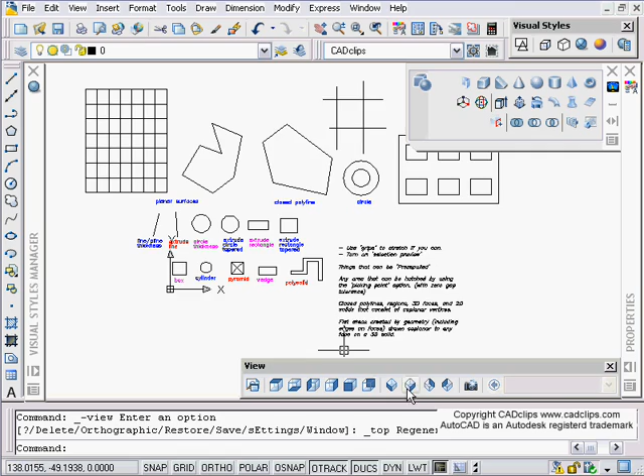So I'm just going to go to a diagonal isometric view, and I've got some basic primitive shapes in here that I've used these tools up over here to create some of these. And then from my previous lesson, I've extruded a rectangle and extruded another rectangle, and I should have tapered that. You can taper that circle being given a thickness, and just some samples of when we go to use our press pull, and don't get it mixed up with extrude, similar but not quite the same, the press pull tool.

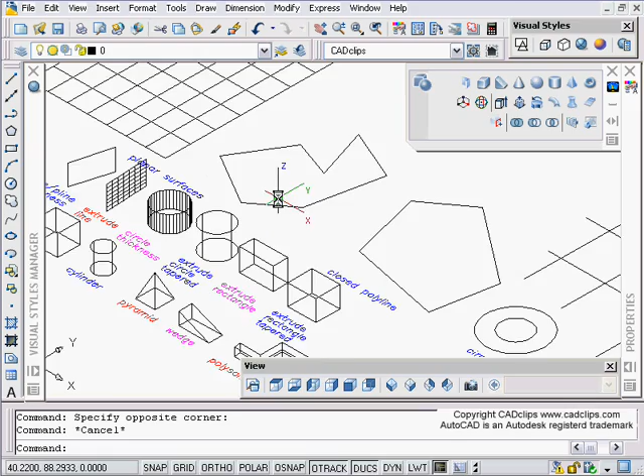And we've got a new object here, some planar surfaces that we're going to create, and this is a polyline that we're going to turn into a planar surface. So I'm just going to take a look at my notes here. First of all, use grips to stretch if you can. And what I'm talking about here is we have some primitive objects over here. As long as we don't press pull them or extrude them, we can use our grips here to stretch the shapes of these quite easily in 2D or in 3D.

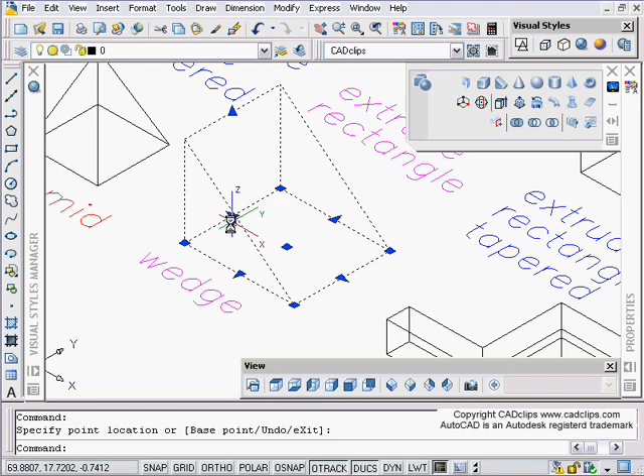So I can go back while this is still a wedge, and I can click on here and do all kinds of neat stuff and whatever is available with that particular primitive object. Okay, or even something that's been extruded. Okay, this has been extruded. Grip on here and you can stretch this stuff around. We have different shapes. We have a polysolid. We can do different things with a polysolid.

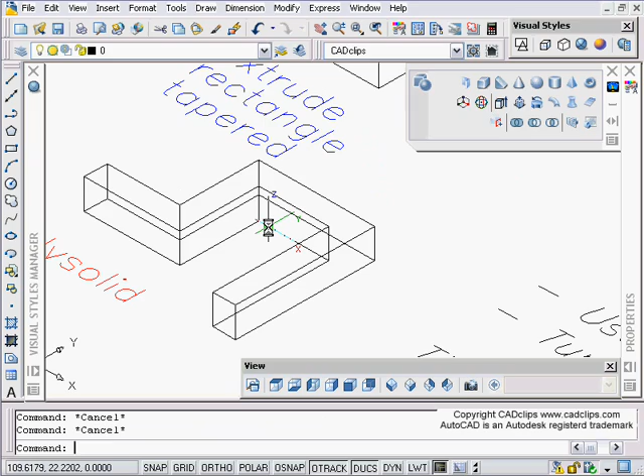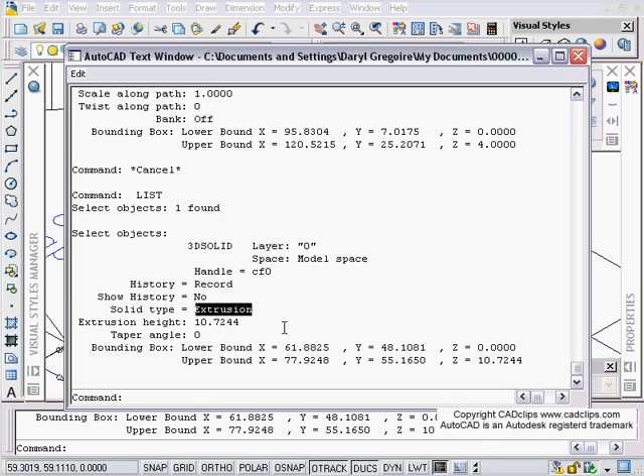Once we go in and use our press pull, you'll notice that if I list this, it lists as a 3D solid. If I list this, it's a 3D solid, and it's called a wedge. Okay, we saw this in the previous one, 3D solid, and it's a sweep. Okay, just take note of that. Okay, if I list this, it's a 3D solid and it's just an extrusion. Okay, we're going to see something else in a minute. Again, we list this, it's a pyramid, and it is a 3D solid.

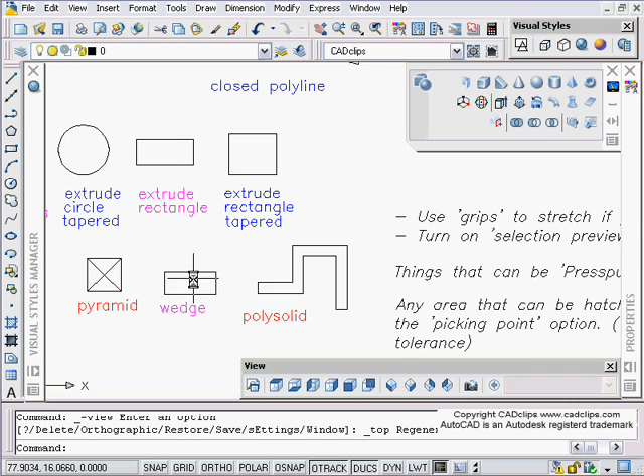Okay, so now when we go to do our press pull, first thing is use the grips as indicated, as much as you can before you go in and start press pulling, because once you press pull, you'll lose the control and the grips of that primitive object. Okay, turn on selection preview when you're doing your press pull. So when you do your press pull, you'll notice that if you go down inside of here and you start your command, you're going to hover over these edges.

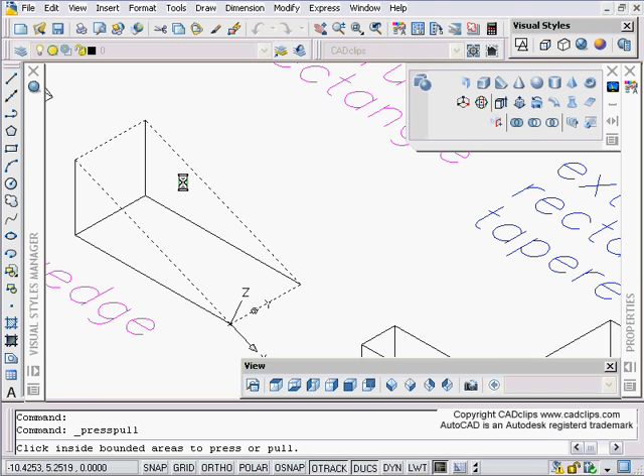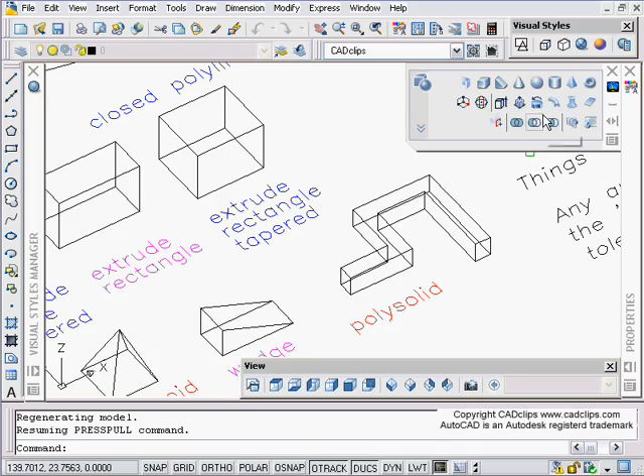Well, if you don't have selection preview turned on in your options under selection, then these edges won't preview, and sometimes you might have to swivel around with the shift middle mouse button to get that other side. If you can't get the side you want, shift middle mouse button will let you swivel around and grab the sides you want. I'm still in the middle of my press pull command. I started the command, and then shift middle mouse button allows me to transparently move around my object and zoom in and out with the wheel while still remaining in that command. Okay, so that's just a couple of notes before we get started. So turn on selection preview in your options.

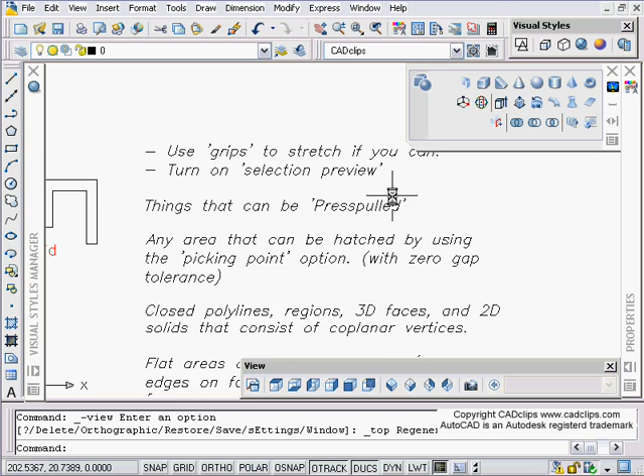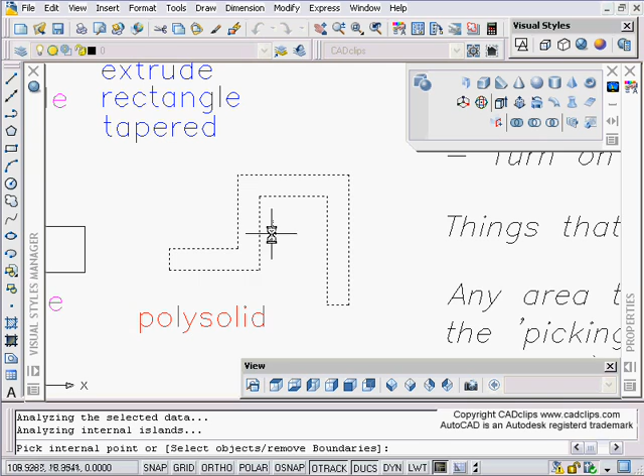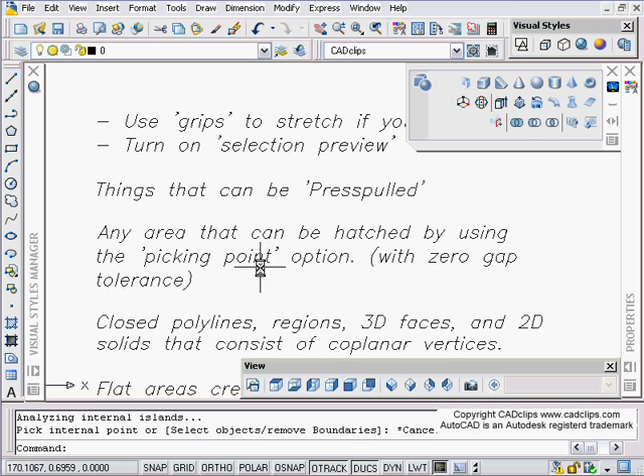Things that can be press pulled, okay, faces and stuff. Any area or flat area, it has to be a flat area that can be hatched by using the pick point option with the 0 gap tolerance, can be press pulled. So if you can hatch it by using the pick point option, you know, when you go in and hatch, I can type in add pick point, and if I can pick a point and it recognizes that, then these can be press pulled. So one of the similarities is if you can hatch it by using the pick point option, then you can also press pull it.

The other things you can press pull are just a closed polyline. We've got some objects over here, some polylines, circles, and basic rectangles. You can also press pull those.

But it has to be a closed polyline. If we do our rectangle command, that is a closed polyline. Circles can also be press pulled, more or less like an extrusion.

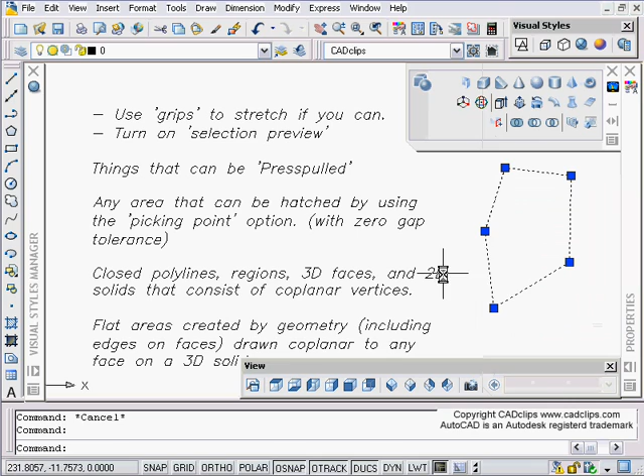If you have a polyline that's not closed, if you work your way around instead of saying close, and you just pick the endpoint and hit escape, that is not a closed polyline. You have to click on that, go to properties, go down to where it says closed, and say yes. Then it's a closed polyline, and now you can go in and press pull that object up to where you want.

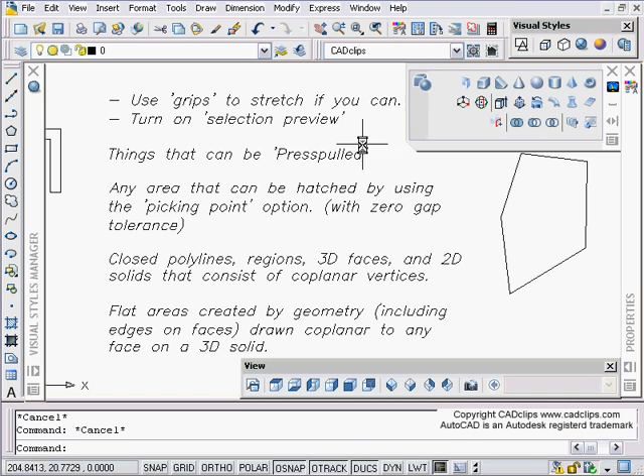So closed polylines, regions, 3D faces, 2D solids that consist of coplanar vertices - we'll see all of these. All things that can be press pulled. We're talking about things that can be press pulled: flat areas created by regular 2D geometry like lines, arcs, and circles, or geometry that's drawn on the edge of a 3D solid. So we're going to see all of that right here.

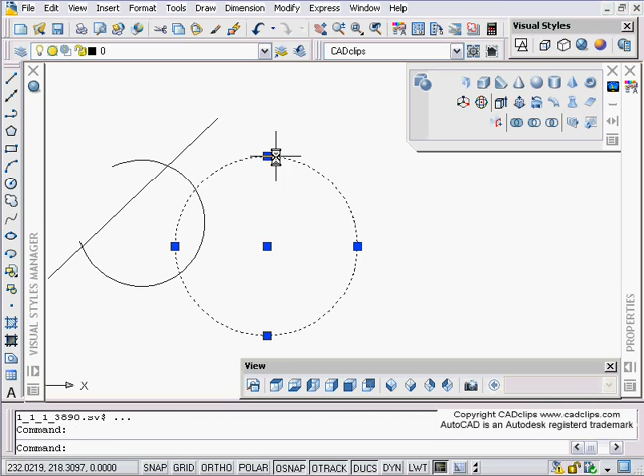Let's just start up here. We can also use a block too. Over here I've just got a circle, an arc, and a line. I'm going to go look at that in my 3D view, maybe change over to my cool conceptual view here.

Now I'm going to use my press pull, and hover over that middle part, and I can press pull that up. Once I do it, I click on it, I can click my grips, I can move it around. Have a look. Okay, I'm going to undo that back.

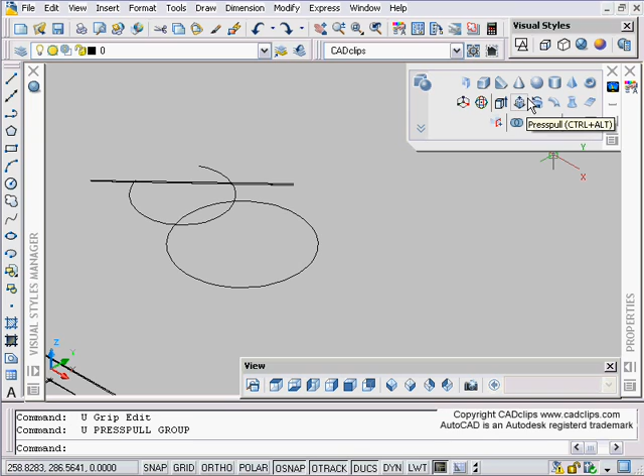Undo. Then I can say press pull. Maybe I'm going to press pull this part up. Maybe I'm going to press pull only this part up. Shift middle mouse button.

Same thing over here - I've just got some rectangles, that's all these are, rectangles. I can say press pull, and hover over here, press pull that up. Is that cool or what? Could have used this a long time ago.

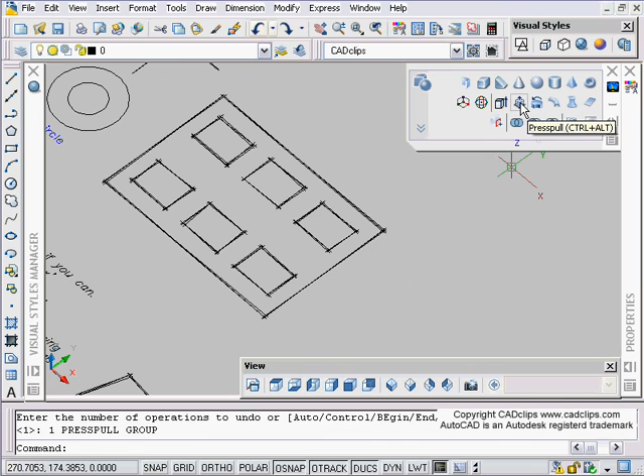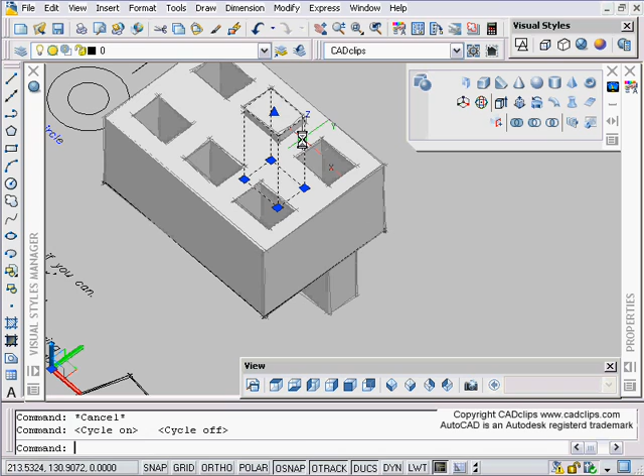Or I can say press pull this guy up, or press pull this guy down. I can still go back, press pull, grab all of these, bring them up, and then grab that one guy that was in here.

Shift space middle mouse to toggle through, grab my grips, pull that one up - all starting from just regular polylines. Shift middle mouse button, hover over here - we've got a couple of circles. Press pull, grab the middle one. Press pull, grab the outer one. That's just using regular 2D line geometry.

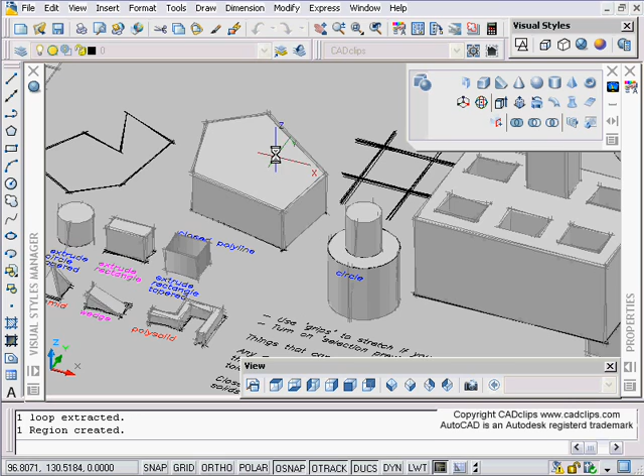Over here I've got a closed polyline. Press pull, click on here, bring it up. Now that I have that, I can say line, draw a line, and I have to make sure I snap to those endpoints because it has to be on that surface, which is where our dynamic UCS comes in very handy. Now I can press pull that up.

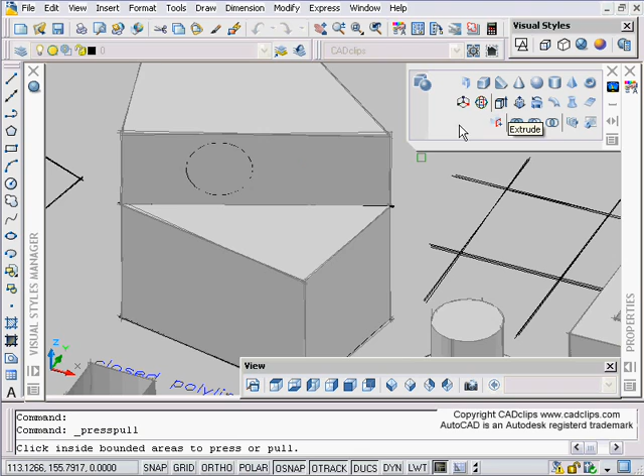Using my dynamic UCS, I can hover over here and draw a circle on here, then press pull, grab that, pull that out. Now I can draw another circle maybe here. Am I pushing it too far? Press pull, grab that little guy, push it in, just like that. Shift middle mouse button.

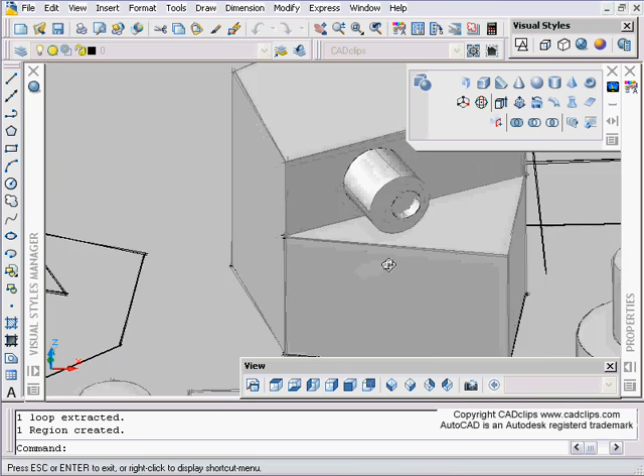Anytime you want, you can start to draw a line on a surface - regular line, but it has to be on the surface. Now that one I don't think went on the surface. Let's just move along here.

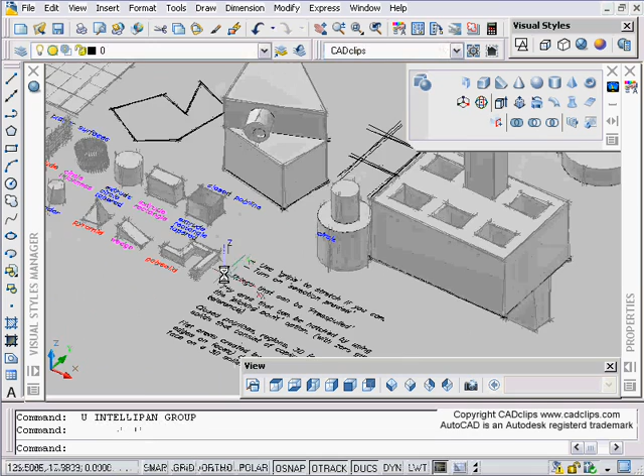Shift middle mouse button. Okay, here we've got a polysolid. No problem, go in, press-pull, hover over it, do what we want.

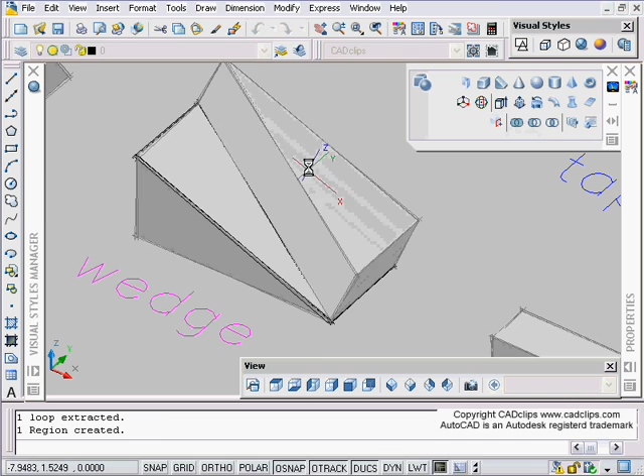We've got a wedge over here. Maybe we're going to draw a line, making sure to hover over this to get our dynamic UCS working. Now I can press-pull, grab that surface, bring it up. Draw another line from there.

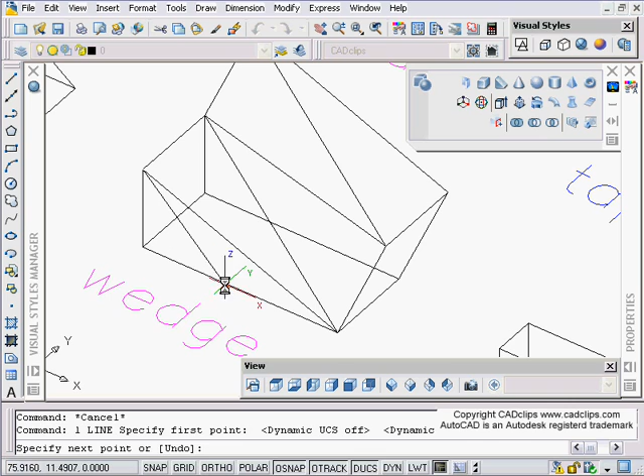Notice the surface is hovering. If I go to draw that line, I type L. Notice I'm picking the surface because my dynamic UCS is off, so I can't draw on that surface. If it is on, I can draw on that surface, then pick there, maybe to that midpoint. Press-pull, click on this little guy, bring it out.

It's really endless, the degree to which you can play with this stuff. Draw on any surface and press-pull the object up. Cylinder, same thing - as a cylinder, it's fine.

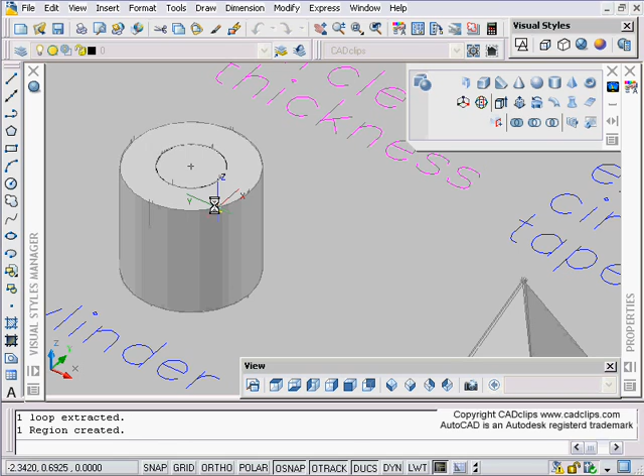If you want to poke a hole in there, maybe we'll draw a circle. Hover over here to get that surface, draw our circle, click on there, do a press-pull, click in that little middle guy, take my snap off with F3, drag down, shift middle mouse - I've added that in there. Unlimited as to how you're going to do that.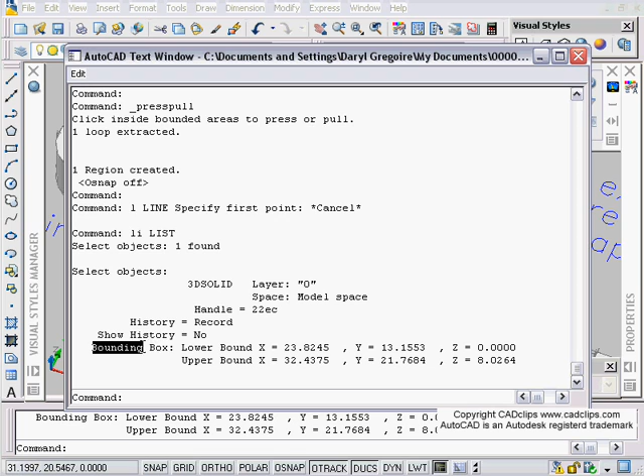Now the difference is if I list this, it's a 3D solid and has no information, it just says bounding box. It doesn't say it's a cylinder anymore. This still lists as a pyramid, see solid type, but if I scroll back, this previous one doesn't show that information, because it's a hybrid type object.

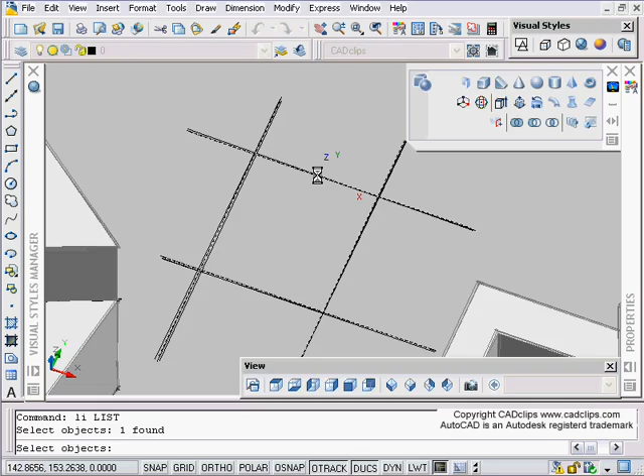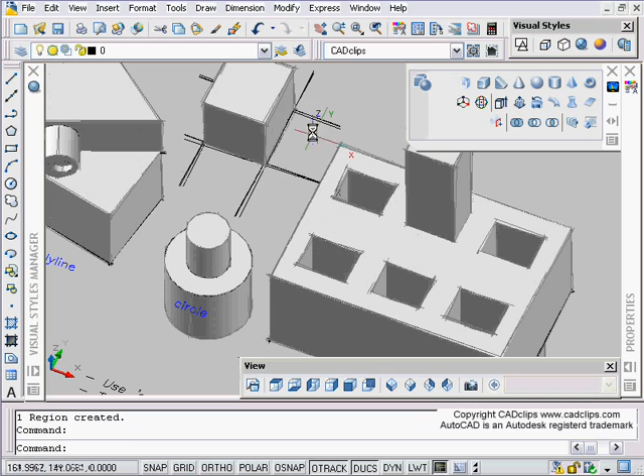Now this is a block. If I list this, this is a block, and the block name is just Block 1, and it's made of lines. But guess what - press-pull, I can hover over that, and grab that. So even 2D geometry that is part of a block can be push-pulled out.

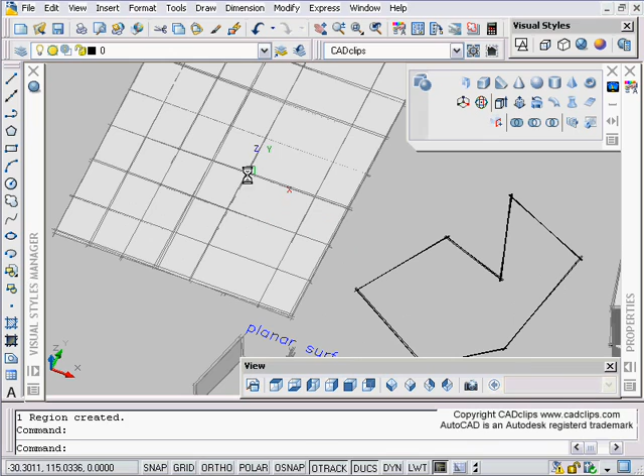So blocks, 2D geometry drawn on top of 3D geometry, closed polylines, cylinders - this over here is a planar surface.

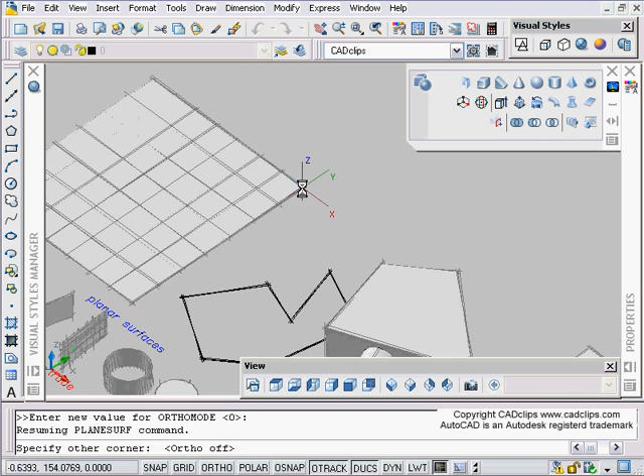Let's erase that, draw a new planar surface we haven't done. When you draw a planar surface like this, I can use my shift middle mouse button here. Make sure that your ortho is off. If you turn F8 on, ortho on, you'll notice it does weird things. So there's a tip for you.

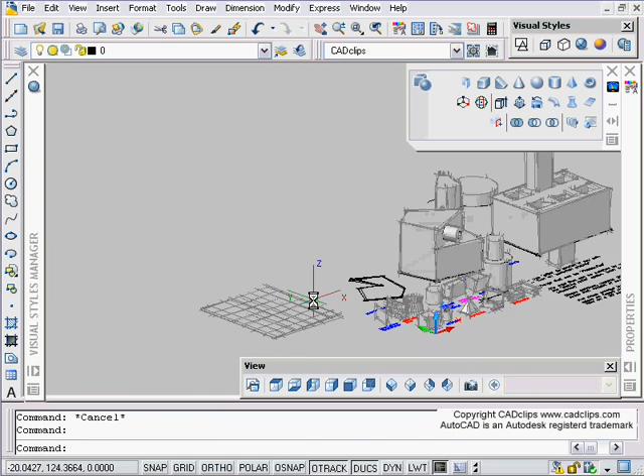Planar surface - when you click on that, if you try to draw right now while moving around, I don't see anything. If you take your F8, your ortho off, then your planar surface will work. Now that we have that planar surface drawn over here, I can use my push-pull, hover over it, bring it up.

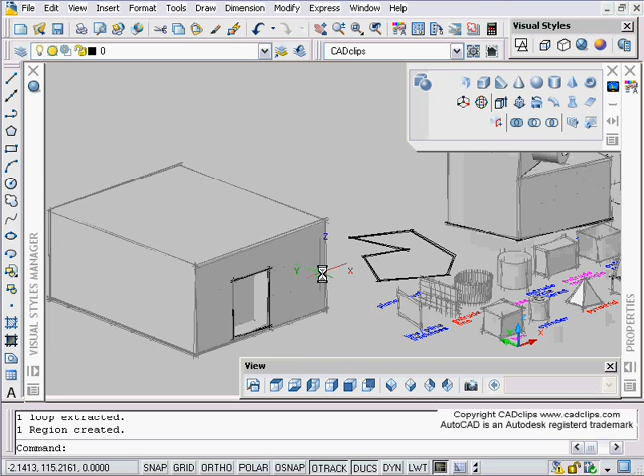Very, very quickly we can start to draw some objects on there where we can very quickly create some shapes of whatever we want. We can fillet and round these edges and stuff, all kinds of neat things with our solids. We're just talking about the push-pull. So, lots of items.

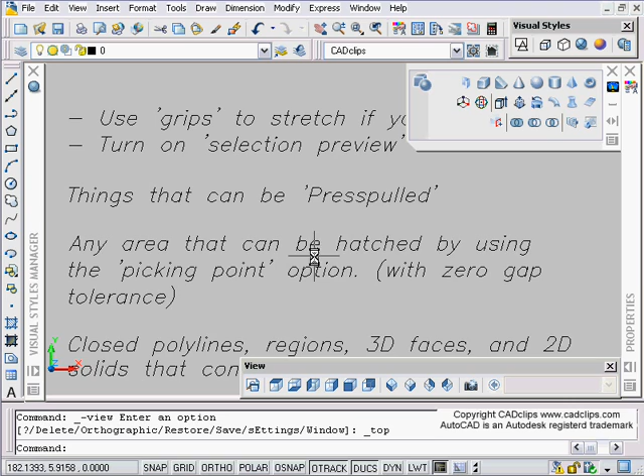Let's have a look at our recap. Use your grips, turn on selection preview. Any area that can be hatched can be press-pulled. Make sure it has a 0 gap tolerance. Closed polylines, regions - if you draw a region, which is really a flat 3D object.

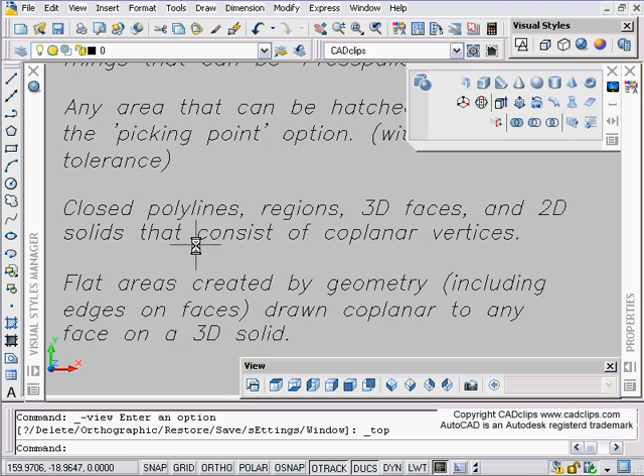3D faces, surfaces, planar surfaces, 2D solids that consist of planar, coplanar meaning on the same plane - any flat area created by geometry, including 2D geometry drawn on top of 3D. So we're using our DUCS. Remember to take ortho off when you draw a planar surface.

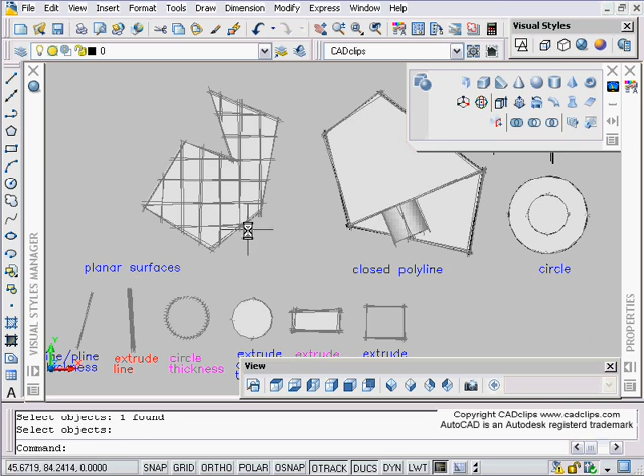Then we can take a polyline and convert that to a planar surface by starting our planar surface, hit O for object, pick on here and enter, and that turns it into a planar surface. Then we can push-pull that up from that polyline. We can also just push-pull a regular old polyline.

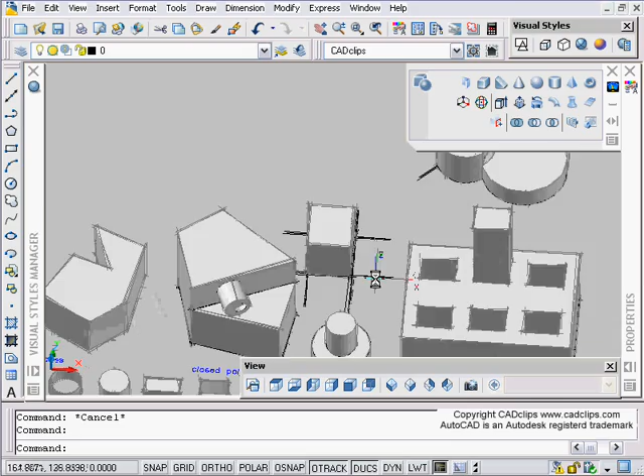We can push-pull an area within a block because that would be hatchable. Remember, the hatch rule: if you can hatch it with a pick point, you can push-pull it. So there's some great tips, and I'm sure you can experiment and have fun with the new push, or press-pull command, in our exciting new AutoCAD 2007 3D tools.